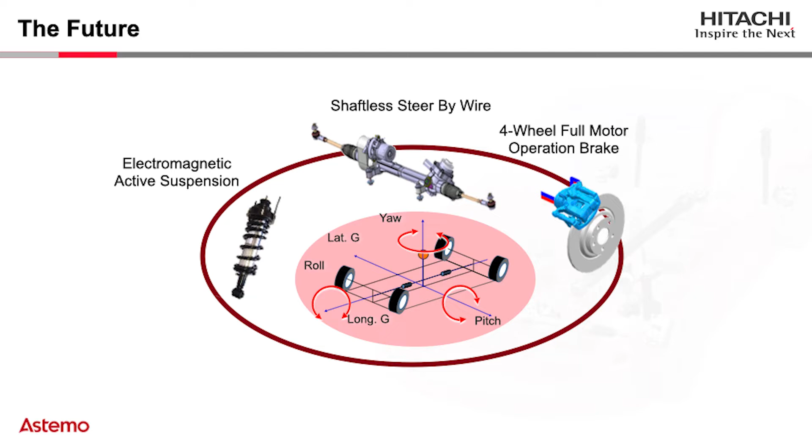Okay, let's move on and start talking about this integration. Where do we want to get? We want to be able to integrate everything virtually. Dampers, steering systems, brakes, the dynamics behind those components. Be able to integrate them virtually, make them work together towards performance, delivering the best quality product to our customers. But let's focus now more on the shock absorbers themselves, the dampers.

The main focus here is we see that we have some issues with long wait times for prototypes. And there is also a growing demand for quicker quotation responses. Our customers want us to deliver results in a time that is even shorter going onwards. And also, we would love to have the possibility to explore new technologies, evaluate the best solutions for our clients and input all of the technologies that we have. And we can use the virtual environment for that. And we saw that opportunity.

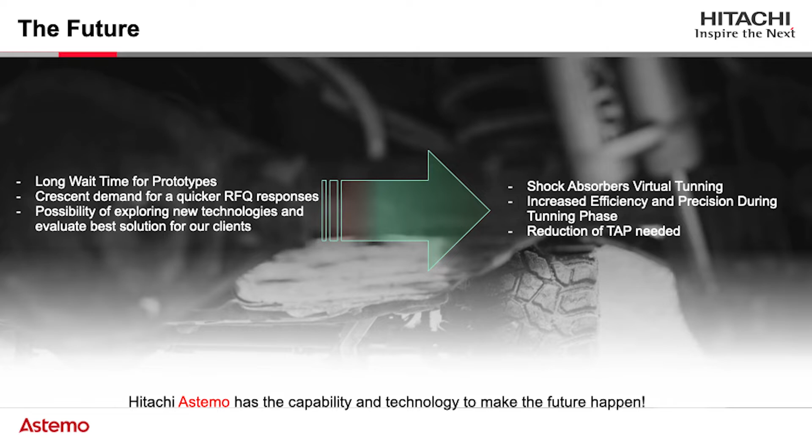We would like to go for shock absorber virtual tuning. How to make that happen virtually in the computer. Not only that, we want to increase the efficiency and precision during the tuning phases. We want to be able to reduce the number of take-aparts and prototypes needed in that process. And we at Hitachi saw, okay, we have the capability and technology to make this happen now.

With that in mind, we said, okay, we need to reshape the process that we do, how we are doing this since the early steps from the RFQ and the study request from the customer, and how we can manage to take it virtually. So we are using CarRealTime on our side. We're able to tune that, plus the design of the shock absorber itself, the dampers, all the structural information that you guys have. So we'll be able to design that alongside CarRealTime.

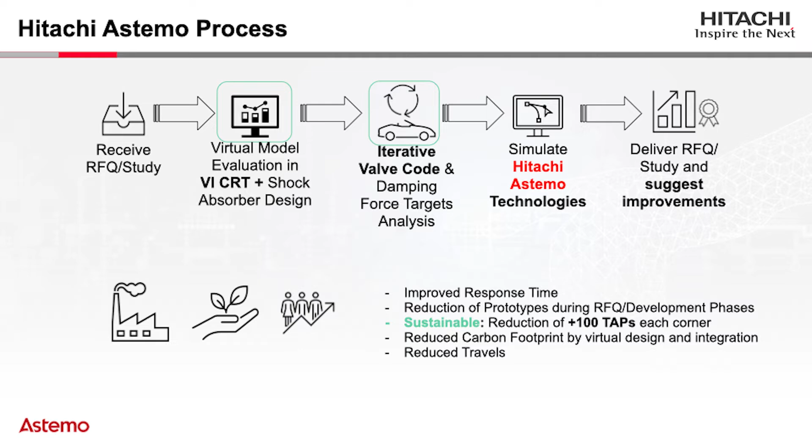As a good reminder, some of our customers order more than 100 prototypes sometimes for each corner of the car. We can reduce that number by far just by going virtual in some stages of the initial process. And the reduction of travel, this is all linked to the reduction of the carbon footprint. We need to travel by plane, so we're consuming fuel, and the whole logistics behind it is not that simple, you know. So once we are going virtual, this is no longer necessary. So we can make it happen now.

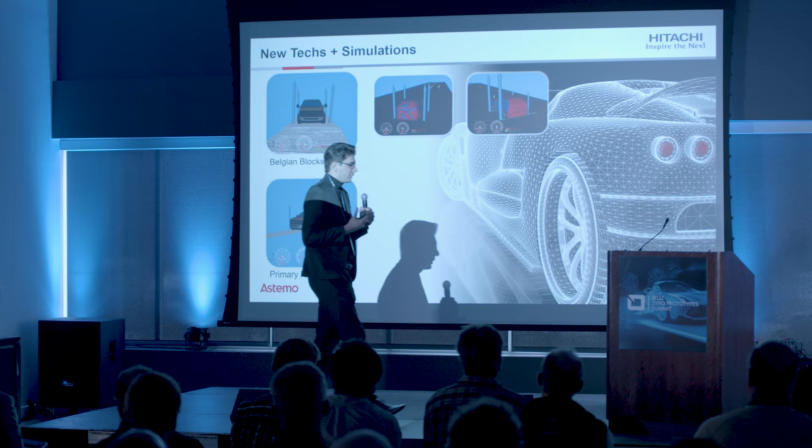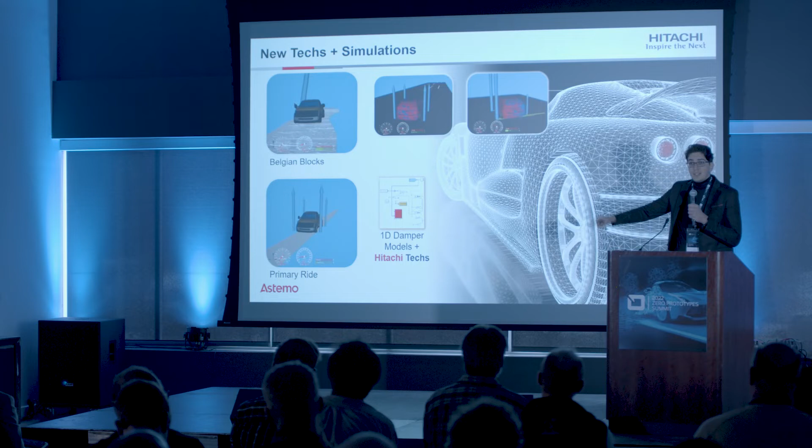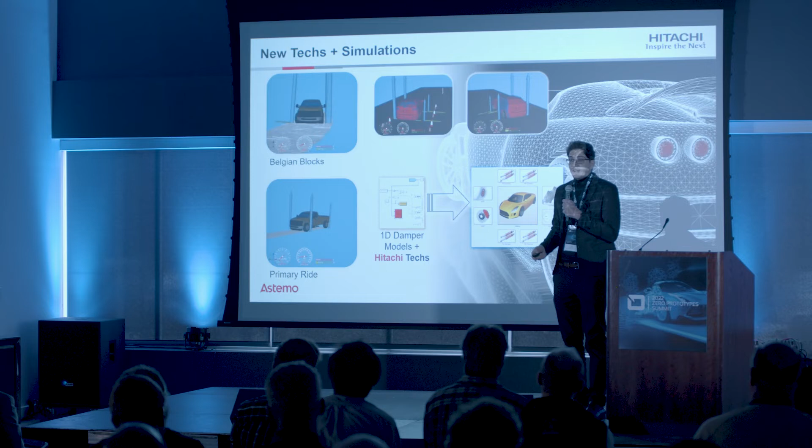Now let's go to the results themselves. What are we doing so far and how are we doing this? So we're going all the way from pickup trucks to off-road vehicles. Here are some scenarios from CarRealTime. And we have the 1D damper model. Hitachi is able now to develop a huge library of 1D models with all the past technologies, current ones, and upcoming ones. Frequency reactive dampers, hydraulic stops. Everything's going to be there in our system. And we're able to simulate that and integrate it with the car model. And we are having consistent results so far.

Here in this example, we have some curves for the frequency reactive dampers. As you can see, the aggressive behavior right here for the force displacement curves and also for the force velocity. We are able to manage that virtually. And with those models that we are doing right now, we can work together with the customer and make those tunes specifically for their needs.

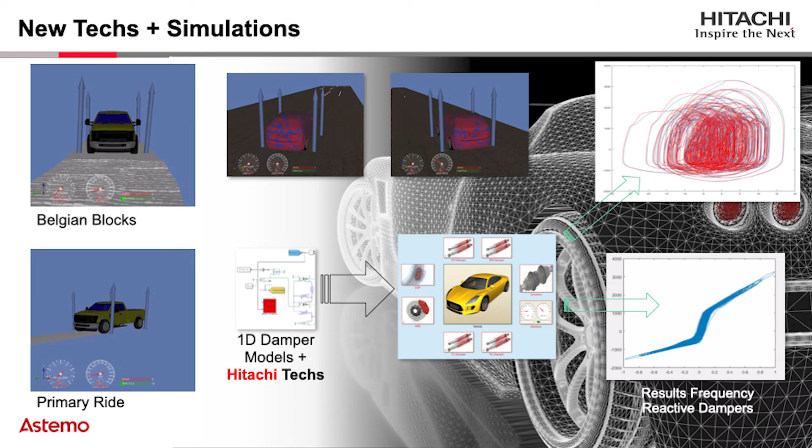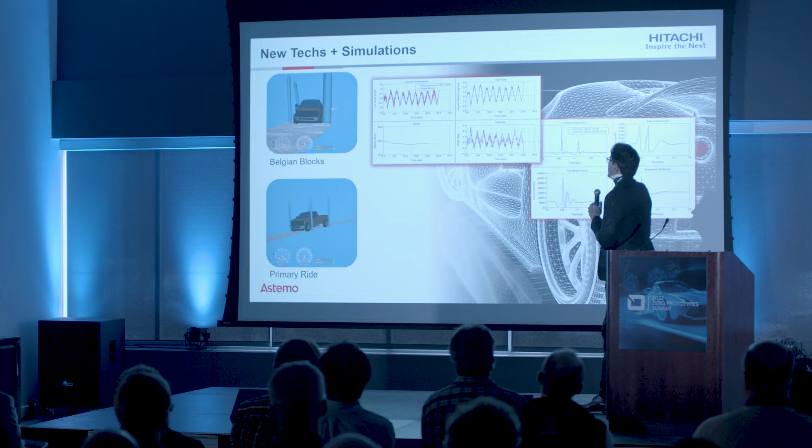And not only about the models itself, but also how we are comparing that to the real-life situations. Here I have some comparison between the virtual model and real-life measurements for a pickup truck. We're able to have consistent data that aligns with the real-life measurements for all the technologies that we are putting into the Simscape. So here's some curves of acceleration. We have a matching curve there. Yaw rate, side slip, vertical acceleration, body displacement, PSD curves.

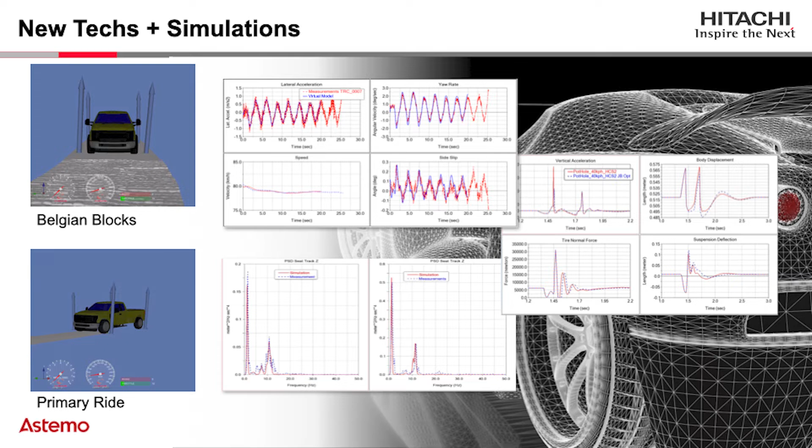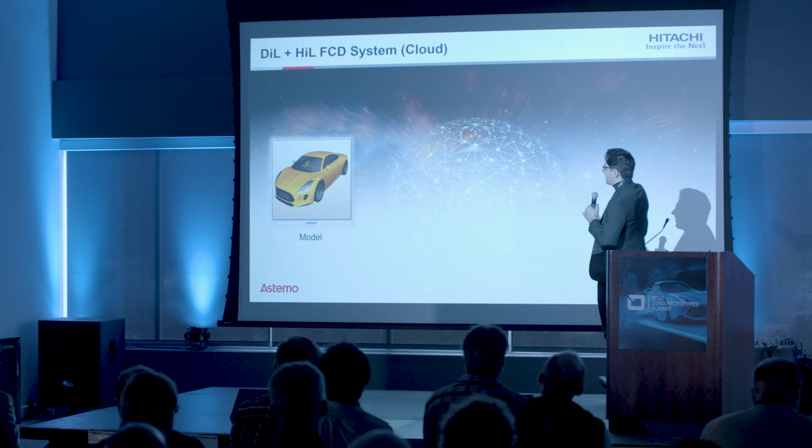We are able to look at that and say, okay, we are confident that those models are correlating and that we are able to talk with our customers and say, we can do this virtually. Okay. Well, let's go back to the tuning itself. What we can do to improve this process. We have our models from Hitachi. We can add the driver in the loop.

So when our customer is driving and feeling this car, feeling this damper, he might want to make changes here and there. Those attributes here and there, they're not the way that I was expecting them to be. They will send that back to us. And we will be able to change those models in real time and deliver to them exactly what they were expecting.

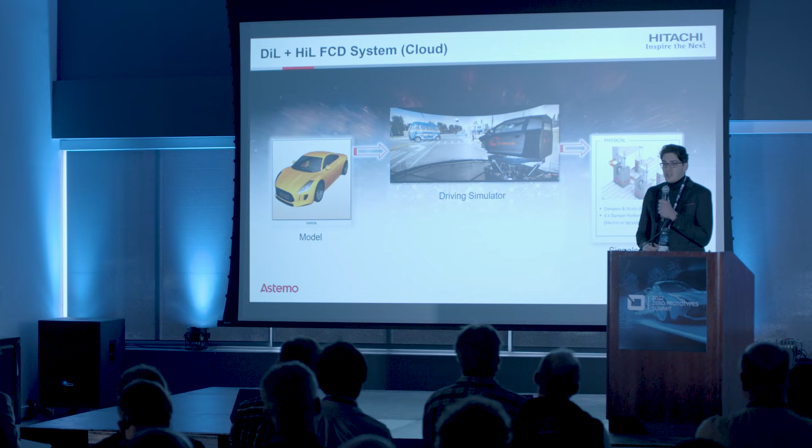Not only that, we can also put the hardware in the loop, so the damper performance test systems, sending back those signals of displacement, velocity, and we are able to work together and improve this. And as a reminder, the hardware in the loop here, this is at a later stage, right, when we actually need the prototypes itself, so we can feel it for durability and also have a better feeling on how the components will behave in the system as well.

So there's quite a few opportunities here that we see, and the best part of it is that it doesn't matter where the customer is. It can be in Japan, Australia, South Africa, Europe. And we can make this tuning happen remotely. All that they need to do is to have the driver simulator close to them, and we're able to tune remotely for them. So this gives us a lot of possibilities. We can make sure that we are delivering and designing per the demands of the driver, which is a very important feature to consider when we are designing the dampers itself.

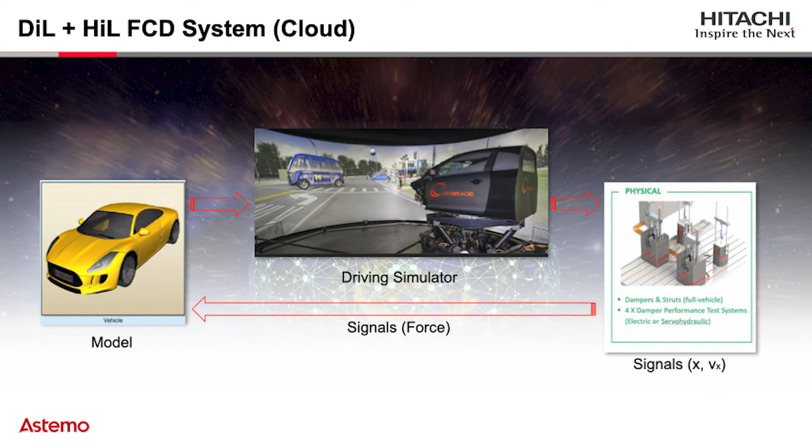Now I'd like to talk about something completely new, I would say. We've been working on quite a few technologies, but what I'm about to present right now is something that I would say will change the way that we design dampers. For the first time, we'll be using deep learning and machine learning on our side. We at Hitachi, we're collecting all of the test data that we have.

We want to make sure that every data that is available, we can add that into a neural network. All of the inputs that we know that the customer might be looking for. Tune those layers for all the vehicle attributes and responses that we expect from a damper. And be able to deliver a product designed with artificial intelligence. We no longer need to go crazy about all the design parameters, everything that might be going wrong in the process, if we can teach this machine how to behave the way that the driver expects it to.

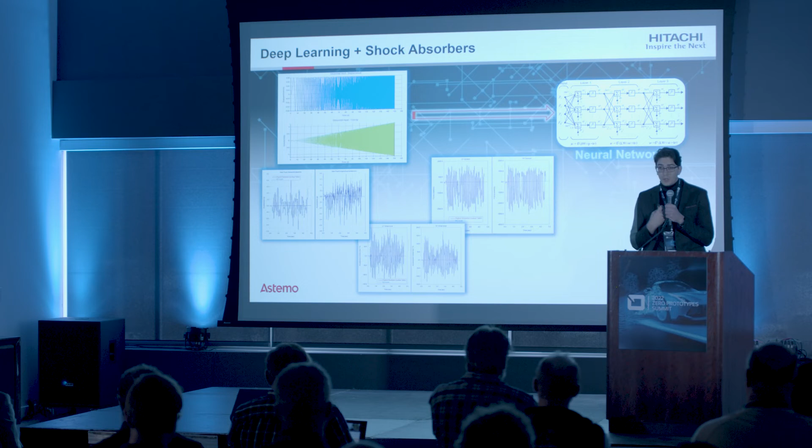So we're no longer tuning just for the component. We're tuning for the way that the driver will use the vehicle. So this is a way of characterizing all of the vehicle responses and attributes for the end customer itself. And working together, we were able to correlate those curves with the artificial intelligence model really well with the simulation. And this is connected with CarRealTime because we need those models to work with us. And those systems are all integrated using Simulink.

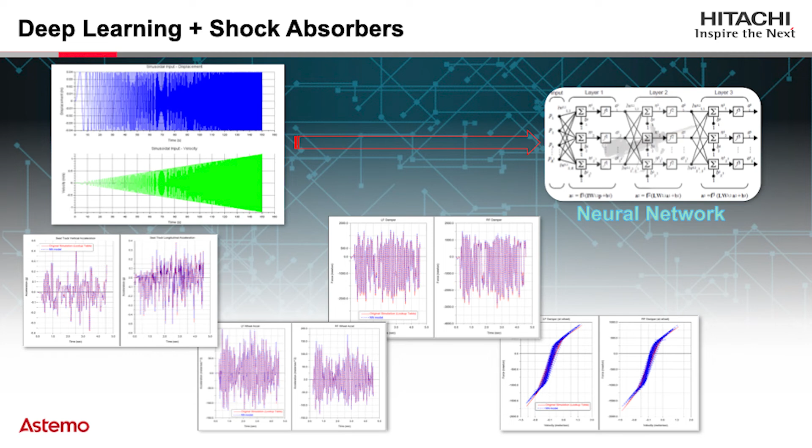And we were able to test here in this case, as you can see, the blue curves right there, it's the artificial intelligence model. And the red one is just a simulation without it. And one thing that we all saw there is that the efficiency of those models is on another level. With the previous models, we were able to do simulations that would take sometimes 7, 8, 9 hours. And with the artificial intelligence, we can make it happen in a matter of seconds. So we're designing something brand new, and we're able to make it happen really efficiently. And of course, the customer will be happy.

Moving on here, guys, it's not only about dampers that we are looking for those solutions with deep learning and artificial intelligence. We want to integrate other systems in there. Powertrain, brakes, everything around the chassis. We want to design that with artificial intelligence, be able to connect that and use CarRealTime to help us with that. Semi-active dampers. Hitachi right now is focused on developing and priming those semi-active dampers to work with battery electric vehicles and design them with artificial intelligence to have the best performance in the market.

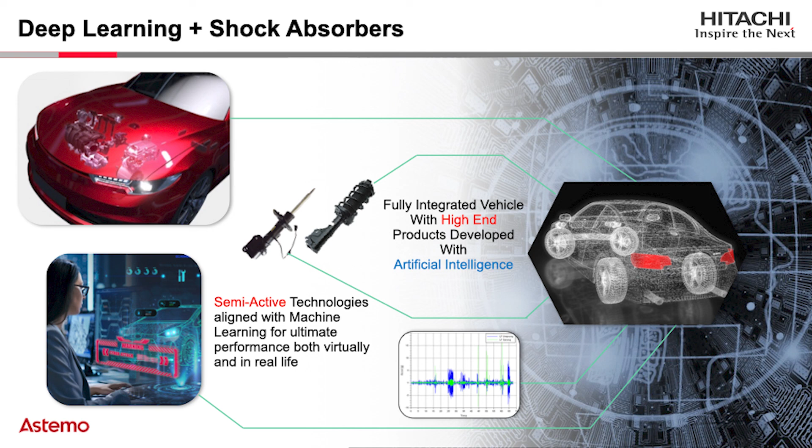Test data for all of the components. We want to make sure that everything is integrated in our models with the machine learning. Not only that, this will be a fully integrated vehicle that will communicate together using AI. And you are able to build the whole product for the customer in record time, as we have never seen before. And everything here is built with artificial intelligence.